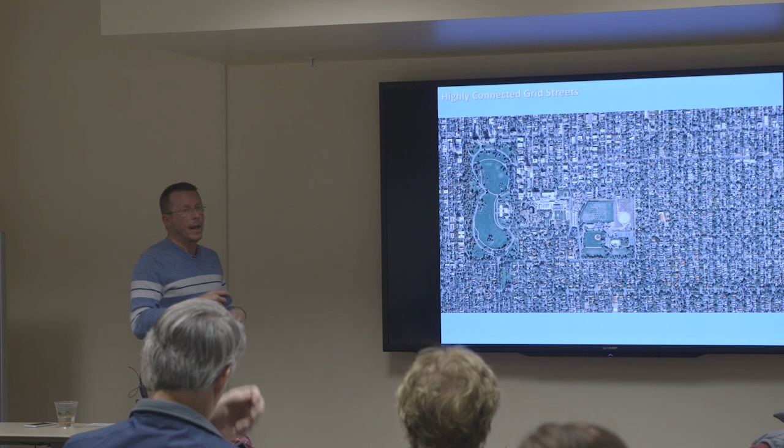So here we can look at the highly connected street grid. This is an aerial view of the Congress Park neighborhood in Denver. We can see Cheeseman Park here, Congress Park. But you can see the very tight grid of streets. So if you wanted to get from here to the upper corner, there's literally hundreds of different possible paths you could take, go up and over, or over and up, to navigate your way. So if something happens in here, if there's an accident or whatever, there are all sorts of ways of getting around. It's a highly resilient way of providing a transportation system.

This green line is the City and County of Denver boundary, and those yellow lines represent the former streetcar system that we had in the city. It's pretty phenomenal. In fact, when all of RTD's Fastracks lines are completed, and we're getting very close, you may know that there are 3 lines opening this year, but once all of them are finished, add that on top of RTD's existing light rail system, the total track mileage of RTD's rail system will be a little less than half of the track mileage of streetcars that we had in the 1930s.

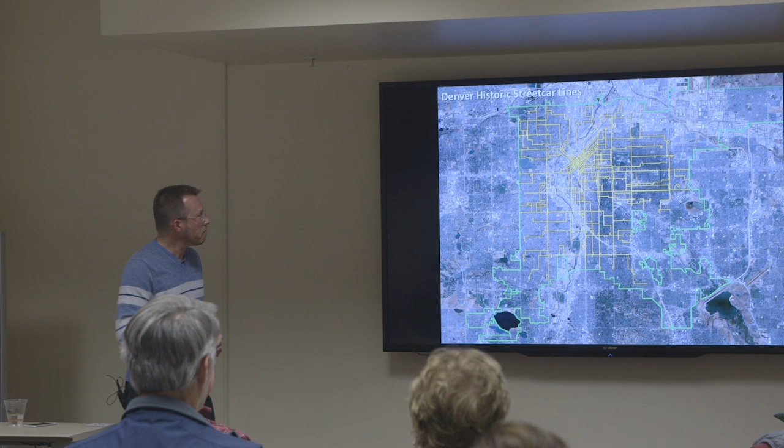Because it made sense—if you had particularly an intersection of two streetcar lines, as an entrepreneur, that would be a great place for me to put my shop. And so naturally, these commercial areas developed and clustered along our streetcar lines.

And today, even though the streetcar is not there, we are left with its legacy, scattered throughout the city—wonderful places like 32nd and Lowell, 41st and Tennyson, Old South Gaylord, Old South Pearl, and dozens more. Small, typically just a block long or so, sometimes just the four corners, where you'll have pedestrian-scaled commercial, and those are the places that people love to be able to walk to from their homes.

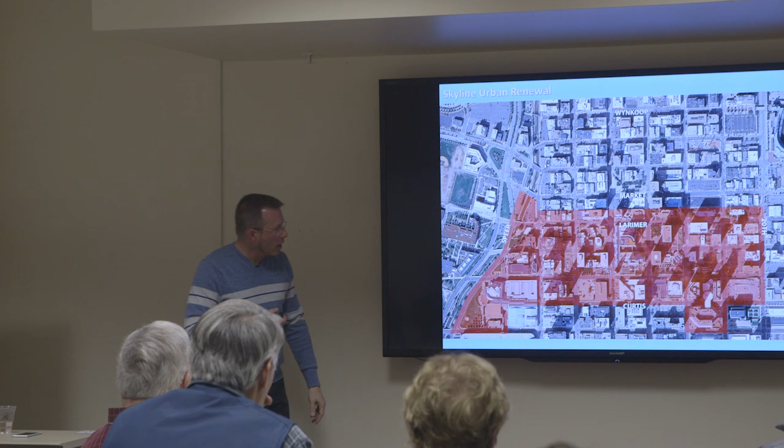The area in red is phase 1 of the Skyline urban renewal area. Everything in this red area, from Curtis to the alley between Market and Larimer, from 20th over to Speer Boulevard, with just a couple of buildings as exceptions, was flattened in the late 1960s and 1970s.

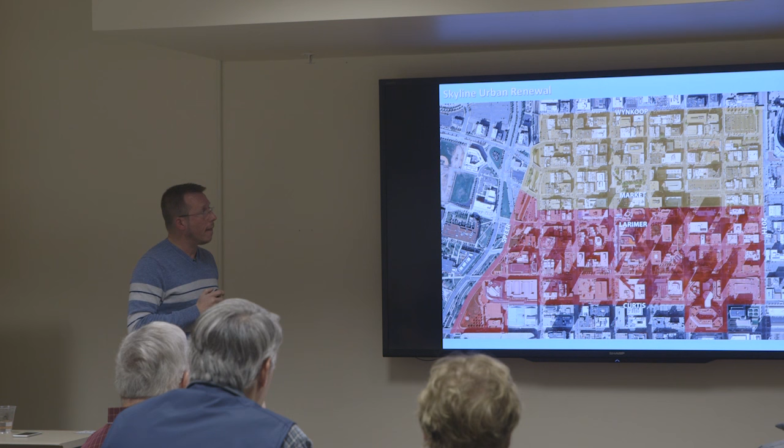Phase 2, which never occurred, but had it occurred, would have flattened everything from that alley between Market and Larimer up to Wynkoop. That, in yellow, is Lower Downtown. If you can imagine downtown Denver without Lower Downtown—I mean, it is the heart and soul of downtown Denver.

So, tremendous destruction. And of course the automobile's impact on the city was profound, because we stopped building cities for people and started building them for cars. Even in our most pedestrian-oriented places, those older parts of our communities that developed during the golden era of city building, we looked to suburbanize those areas.

So we found ways to widen the streets and make it even easier for people to drive, and offered plenty of places for free or relatively inexpensive and convenient parking.

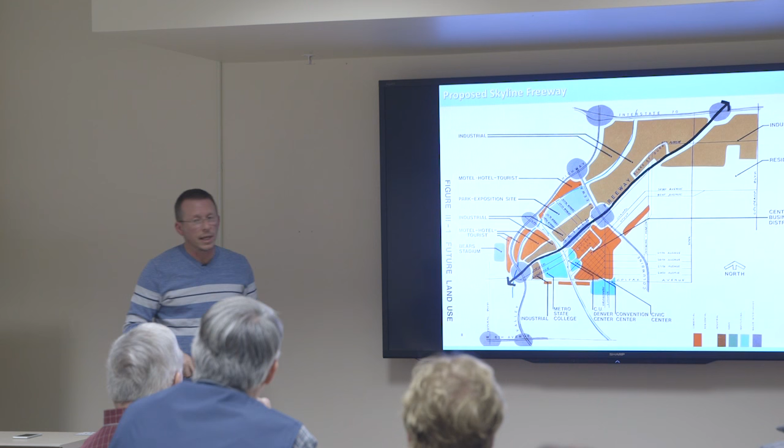Here's a sequence of diagrams. This is the Platte River, and this is I-25 as it existed. This would have been the Skyline, and Mile High Stadium is right about here. So the first thing you can see is that the interchange sits on top of the river.

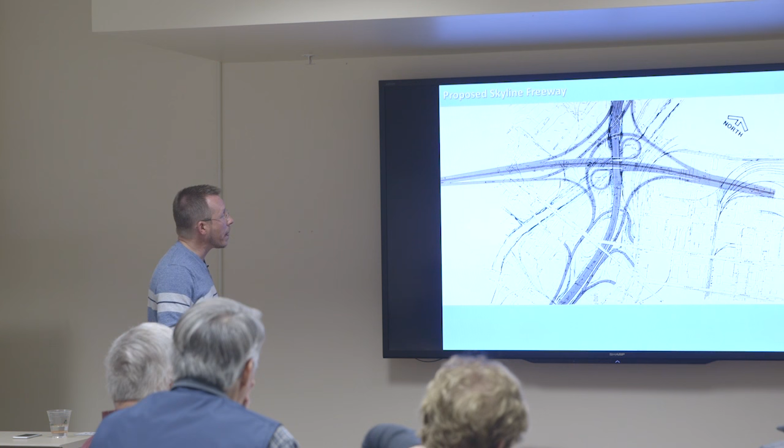That just goes to show you, ethically and value-wise, what we thought of rivers and the natural environment during the modernist era of the 1960s and 1970s. This is the best one—the labels in red I've added on top of the black and white historic image, and I also put a star where Union Station is.

So again, Larimer, Wynkoop, Lower Downtown, flattened by a freeway. And if that's not bad enough, everything from Wazee to Wynkoop that says 'proposed freeway' up at the top was planned for parking. So, you know, very convenient.

You can fly in your car on the expressway, zoom into downtown, get off on this little ramp system, and then have about a 7 square block parking lot that you can conveniently park your car in.

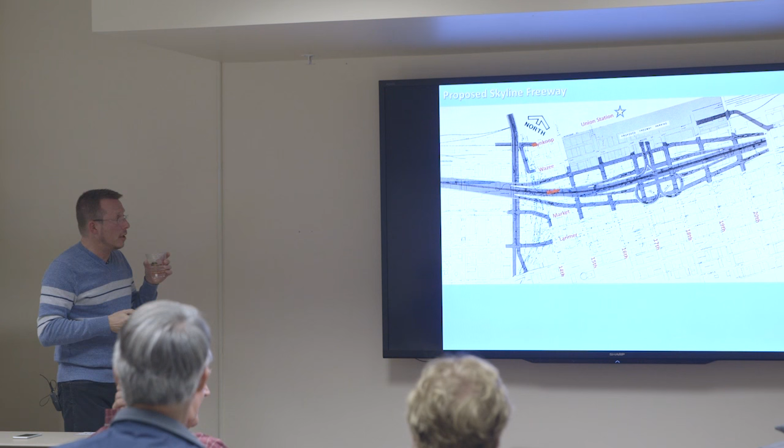There must have been a lot of this going around. We're from New Orleans, and about the same time they proposed a French Quarter Freeway which would slide right by Jackson Square and St. Louis Cathedral, right along the river. It looks like a mirror image—every city was doing it.

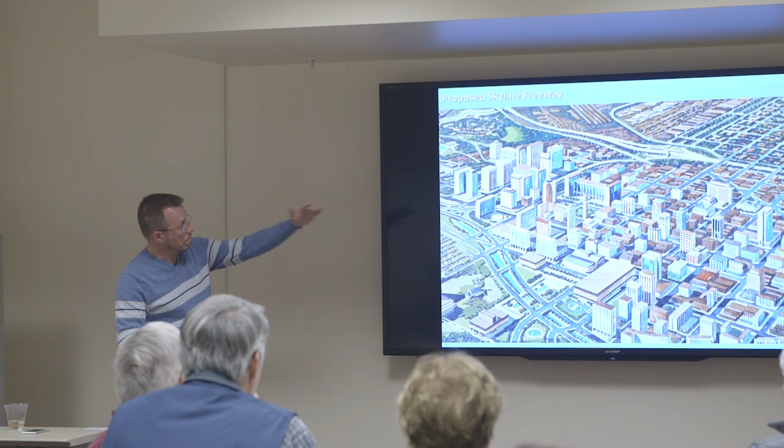So that was kind of the 1940s to the 1990s, 80s, 90s-ish. Then around 1990, things started to change, and cities started making a comeback. But they had a long way to go—it was an uphill fight, because they were fighting against 50 years of this cultural, economic, and physical force called suburbanization. It's not something you just change overnight. Eventually people started to say we have to find a way to allow our cities to thrive once again.

So the urban renaissance era, from 1990 to about 2010, really focused mostly on civic investments. Here in Denver, this is the era of the civic project. In downtown Denver, we built one of just about every possible civic facility you can think of during this era, from stadiums to libraries to museums to convention centers—you name it, we built it. The impetus for a lot of that was essentially trying to make or keep downtown Denver the relevant heart and soul of the region.

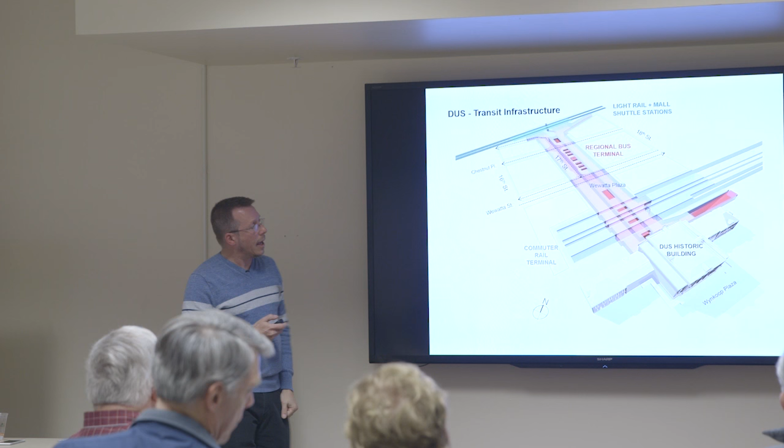So the infrastructure, three basic parts: light rail, underground bus concourse, connecting to the commuter rail platforms under the dramatic canopy right behind the historic station.

The A line, which is the line to Denver International Airport, opens April 22nd. And that'll be 15-minute headways, meaning a train will leave DIA and a train will leave Union Station every 15 minutes all day long. I think it's from like 6am to about 10pm, and then during those off evening hours, it's once every half an hour. 37 minutes, and I think it's $9 or $10.

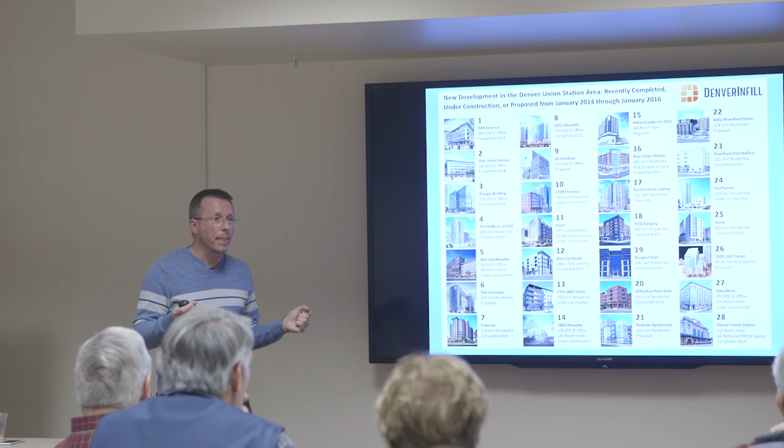So in the Union Station area, the zoning allows for any kind of use, and the free market, capitalism at its finest, has given us naturally, organically, a really good mix. There's a lot of residential, but there's also a lot of office, 3 or 4 hotels, and a bunch of ground floor retail. So Union Station is naturally developing into exactly what we wanted, which was a place with a lot of different uses.

I'm going to go through and give you a few highlights of some of the taller buildings under construction, and then we'll open it up to questions. You can look at this diagram on my Denver Infill website.

This shows you some of the detail of all those symbols that were on the map. The numbers correspond to the table at the right, and I know you can't read that, so I've blown it up here for you.

Since the start of this decade, January of 2010, within a 1.5 mile radius of the historic D&F Tower at 16th and Arapahoe, 7,700 residential units have been completed. 5,000 are under construction right now. Another 2,100 are proposed, formally announced. And about another 4,000 units are in the pipeline. So just with the ones completed and under construction, we're talking almost 13,000 residential units, which equates to somewhere around 18 to 20,000 people within easy walking distance of all that downtown has to offer.

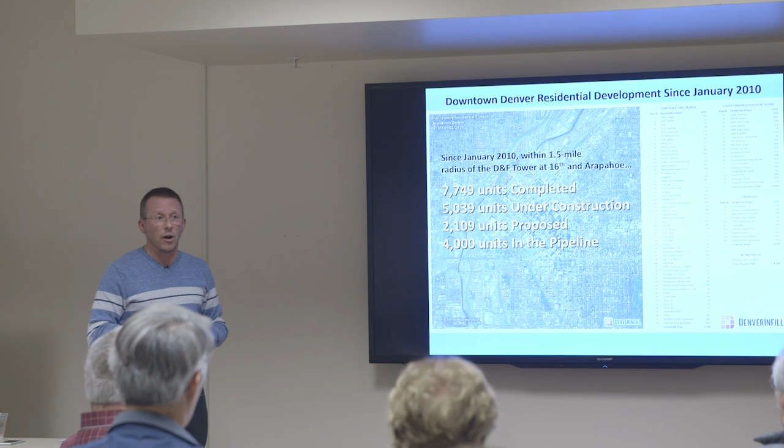So to conclude, here's just the last couple of slides showing you some of the major projects under construction, and then we'll open it up to Q&A.

Confluence is a 34-story apartment tower that is under construction, and they're still putting in their foundation.

1776 Curtis is a 28-story apartment tower at the corner of 18th and Curtis, along with an office component, and they just got started in December. I used to park there. Not anymore. Sky House is right next to the Brown Palace, a 26-story residential tower, and that is getting close.

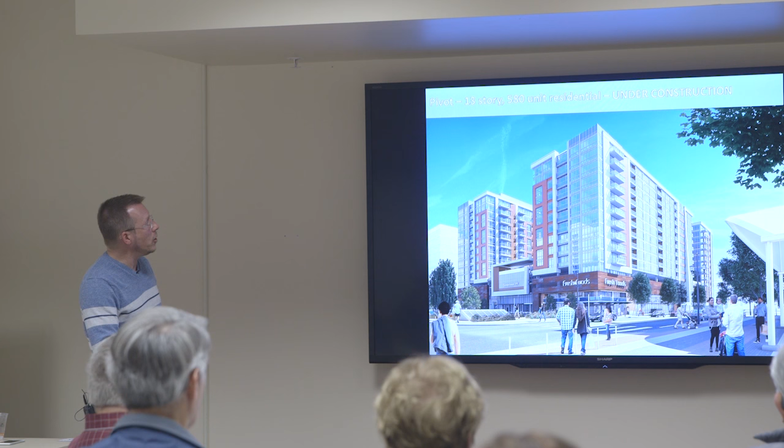This is right behind Union Station, Pivot. 3 13-story towers over a flagship Whole Foods. It'll be the largest Whole Foods in the metro Denver area, and they are now going vertical.

Block 162, which is in the heart of the Central Business District at 16th and kind of California and Welton, is a 32-story office tower and a 32-story hotel. That is proposed. This is the redevelopment of Market Street Station, the former bus facility for RTD, which is now closed since Union Station opened.

A series of buildings kind of wrap around the whole block, much more of a lower scale, keeping it in scale with the historic buildings of Lodo, so kind of in that 5 to 10 story range. And that is it. So a lot to cover, thank you.